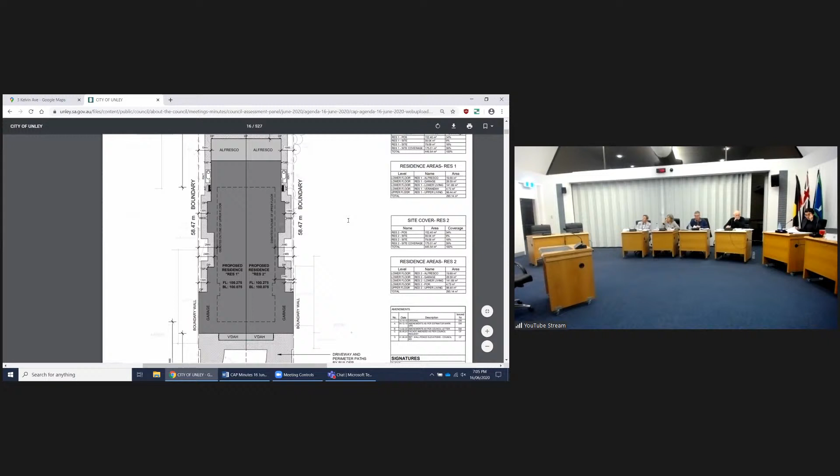So we'll move straight into our first item, which is number 3 Kelvin Avenue at Clarence Park. Members, that's an application to construct 2 two-storey dwellings with garages on the boundaries, and we do have a number of representatives wishing to speak. Before we go into that, Andy, did you want to just brief us? There were 2 representatives who are out of time, so invalid representations. Did you want to just, before we go into that, brief us? Yes.

Council received 5 comments on the application after the public notification period. 3 of those were valid representations because they were received within the time frame. 2 of those were considered invalid because they were received outside of the public notification period.

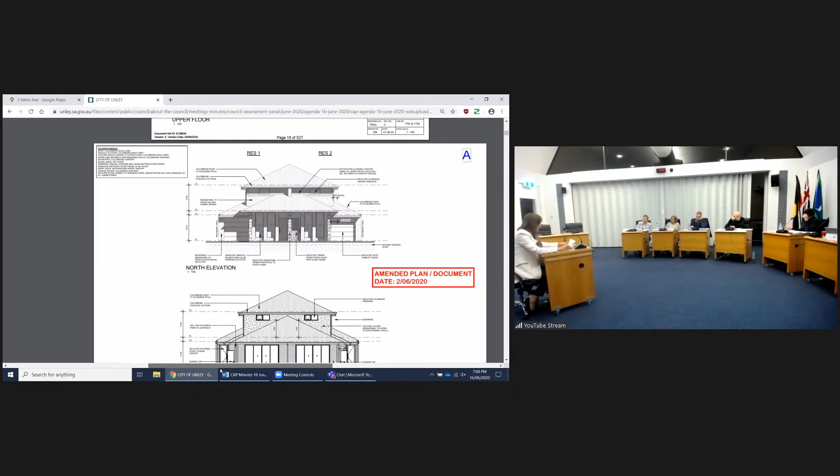PDC 23 reinforces this direction as it also requires the desired character and built form of a development proposal to align with the immediate and neighbouring structures within the zone. This is further reinforced by PDC 29, which advises that the proposal be compatible with the streetscape and the prevailing built form within the zone and the locality. In addition, PDC 32 requires that the appearance of buildings should be of high quality, the visual massing of facades minimised and external fixtures integrated through design methods that have regard to colour finishes, building materials and textures, facade detailing and proportions of solid walling and window and other building penetrations.

Also the articulation of walls, roofs and the use of verandas and eaves. I suggest that the proposed detailing and finishes of this application does not integrate with the building materials and textures of the locality and the immediate landscape, streetscape. For example, the honed stone veneer to the northern elevation specified in this application does not match the uncut sandstone common to the street and the zone in scale and finish. The quality of the selected finishes and detailing of this elevation are not in accordance with the neighbouring properties and so will not enhance the streetscape. Rather, it will reduce the amenity and appeal of Kelvin Avenue.

I have additional concerns around overshadowing and removal of trees. The shadow diagrams are insufficient to determine the impact on the residences to the east and the west of the development proposal. Shadow diagrams for the summer solstice and the 2 equinoxes are also required as the angle of the sun varies depending on the time of year. The shadow diagram should also include an outline of the neighbouring houses in order to successfully assess the shadowing impact.

The landscape plan shows new plantings as replacements to the existing established trees to the rear of the sites. The trees specified are species that will not reach the same height as the existing trees, nor their canopy cover. I propose that the natural amenity of the area may be retained by keeping the existing trees to the rear of the property that do not impact the new construction. All immediate neighbours, occupants and existing bird life will benefit from retaining these trees.

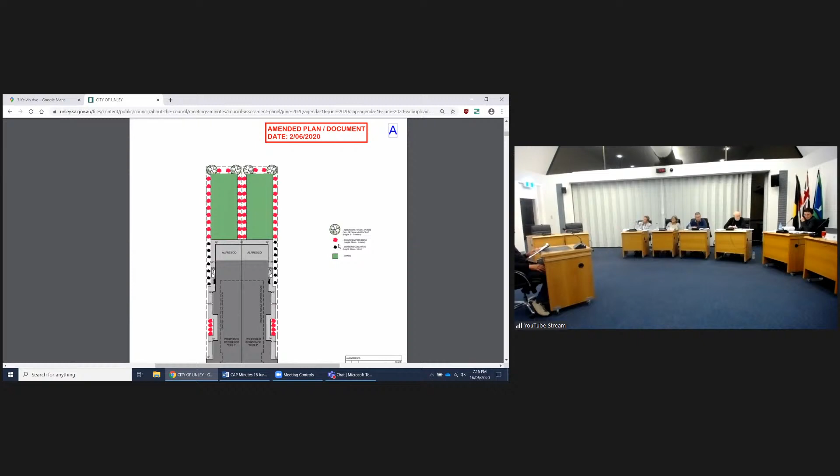PDC 45, car parking: the proposed development does not even meet the relevant table UN 5 requirements. Planning documents state that a large variation increase of 50% is required just to bring it into line with the standard. The on-street parking is considered totally inadequate. Even the current single user regularly uses 2 street parking bays to cater for his needs. However, with this proposal, street parking will be reduced in front of the property to allow for an extra street access for the additional property.

Unlike what's stated in the Planning Department submission, when you have on-street parking near a railway station such as this property, users of all-day street parking from outside our suburb use the street when commuting, which is currently what happens. The number of off-street parking spaces therefore needs to be increased rather than decreased, to accommodate the extra parking actually required. In my judgment, this is extremely inadequate and at variance with PDC 45.

In conclusion, in my judgment, 3 of the 4 items listed in the conclusion of the planning development submission are very seriously at variance with the principles of development control assessment. Thank you.

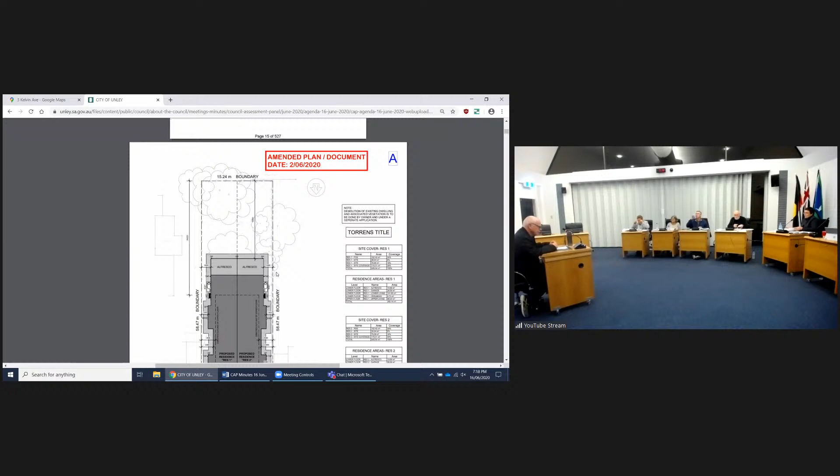The issues which he believes have not been satisfactorily resolved are: first, the proposed development does not conform to the first principle of development control, PDC 1, reinforced with PDC 23 regarding replicating building heights, mass, proportion or siting. He disagrees with Council's summary of issues on page 7 of Council's report, that there are no other similar houses in Kelvin Avenue nor the adjacent Parker Terrace.

Patrick is looking at this from a street perspective, while the council would presumably be looking at a zoning area. There would be very few, if any, similar developments in all of the Clarence Park RB 350 zoning area. From the representations received, it would seem the majority of Kelvin Avenue is totally opposed to this development, described as, and I quote, ugly, out of context, an ugly monolith, looks like no other in the street, and effectively a single massive 600 square metre structure, end of quote.

Second, overshadowing and overlooking of adjacent properties. The shadow diagrams submitted by the applicant are insufficient to determine the impact on adjoining residents. For example, the 10 west-facing solar panels on number 1 are positioned to provide high output during late afternoon in summer to support the grid during peak period. The latest time shown for the shadow diagram is 3 p.m. The loss of solar input at number 1 and number 1A has not been addressed, nor the loss from any future solar panels at number 5.

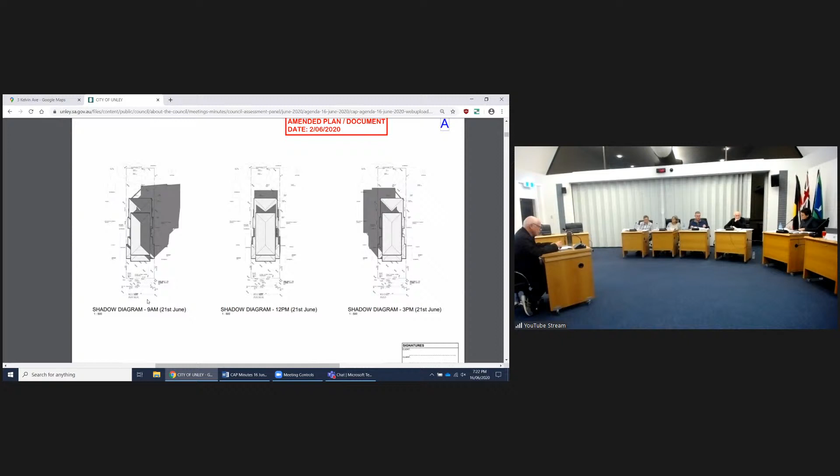Summary. In this report by council, and I quote, upon receipt of the subject application, administration advised the applicant that the proposed dwellings did not adequately address a number of development plan provisions and that the application could not be supported. The applicant made some small amendments and advised they wished the application to proceed, end of quote. The changes made have resulted in the structure being bulkier and higher and not in keeping with the existing planning and development guidelines and the amenity of the surrounding residents.

We ask that the panel, when judging these major deficiencies in the proposed development, do so with fairness in mind for the affected neighbours and neighbourhood, with reference to PDCs 1, 23, 13, 14 and 45, and having regard to the precedent for future projects. In summary, we ask that when making your judgment calls with these major deficiencies, you reject this proposal, as PDC 1 does not comply, PDC 23 does not comply, PDC 13 does not comply, and PDC 45 does not comply. Thank you.

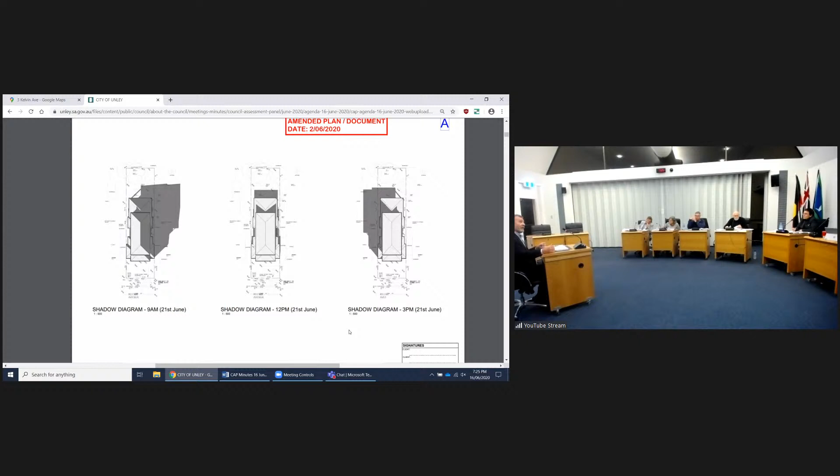As we know, number 3 Kelvin Avenue faces north, so the biggest impact of shadow will be on the southern aspect, their rear yard. The only real effect on the adjoining properties will be early morning or late afternoon, as can be seen on the shadow diagrams.

Another issue raised was the existing rear trees in the yard. Our client currently lives in that residence and will be owner-occupying the right-hand unit, so he'll be well aware of the impact of those trees, whether or not he wishes to retain them. That's something we could also consider to satisfy the representative's concerns.

Regarding the actual application, we took the representative's concerns very seriously and did an extensive review of the designs, submitting amended designs in accordance with a lot of their concerns.

Regarding bulk and scale, we've set the upper storey back another 2 metres from the front facade. The front setback is 11 metres back from the front boundary, sufficient to take 2 off-street car parks as well as the undercover car park, so technically 3 off-street car parks per residence, leaving over 6 metres between the 2 adjoining single crossovers.

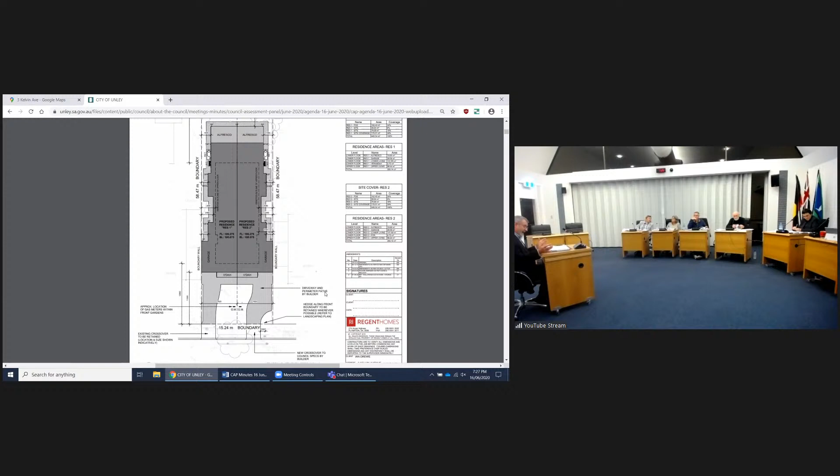We'll also be retaining the existing front hedge and front landscape, so we won't be cutting into that with the new single crossover on the right-hand unit. That keeps a nice softening effect, and the existing street tree will remain too, giving a nice street appearance, especially from the other side of the road, since the upper storey is set back and, on the side elevation, is actually in the same plane as the lower roof. We've also added a front veranda, a pitched roof veranda.

So when you're standing at the street, your eye is naturally looking away from the top. I think the argument about height is really taken away because of the projection your eye takes from standing at road level.

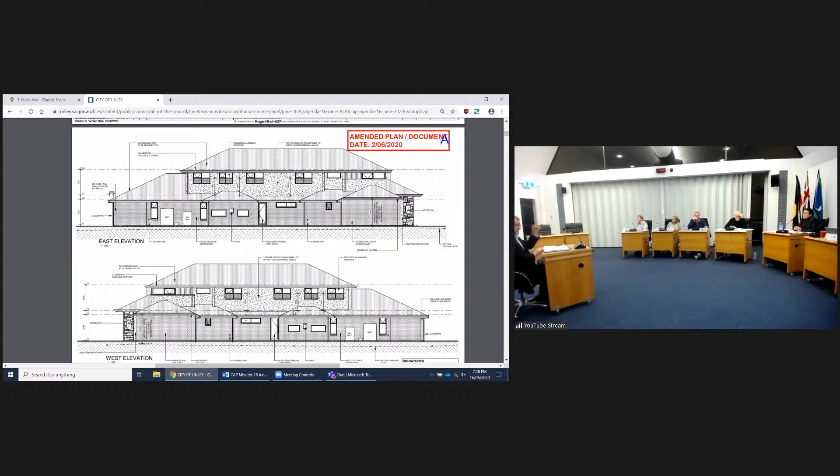Another item the representatives raised was privacy. You can see from the side elevation that we've used obscure glass up to 1.8 metres above floor level, and we've set the window head heights at 2.4 metres, so unless you're 6'6" or taller, there should be plenty of privacy.

As I said, we spent a lot of time and effort reviewing the design. We had a lot of correspondence and feedback with council, so we tried to work with the representatives' concerns, and I think we've come up with a pretty good design to satisfy those needs. We've addressed all the items in the principles of development control, and that's been assessed in the planning assessment. So I think it's a very good design for that area.

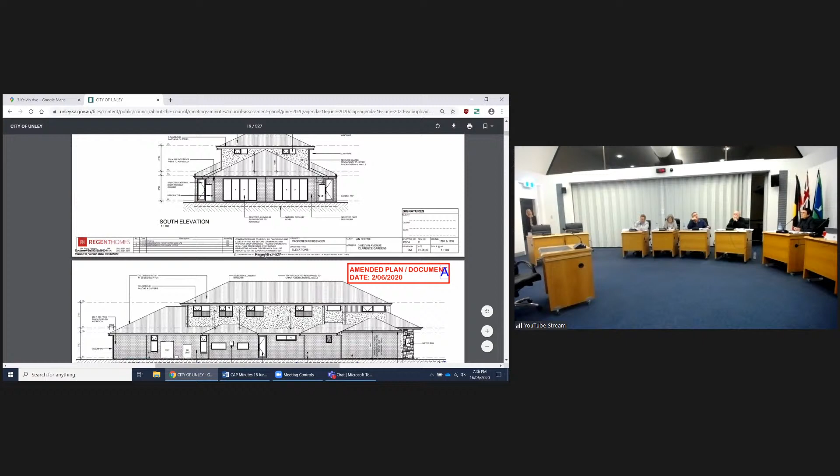Then on the garaging, it's measured by the planners as taking the element of the building that is garage, so from the boundary to the middle section that is not garage - that's how the measurement has been done. So that's 42%. If it was taken by the width of the garage itself, it would be even more than that.

But measured like that, if the garaging to the sides was done as carports, not as garages with a brick wall on the boundary - and the building at the end of the street on the right-hand side, which has got a garage on the boundary, shows how bad that looks. If that was done as a carport - and looking at this street, every house in the street has got a carport to the side, not a garage with a brick wall on the boundary. It doesn't exist in the street.

So if the garages were done like - and there's someone who designs houses like this for a living - it is possible to design to widen the middle section of the building and go to carport to the side and achieve that 30% thing. You'd then have a 2.7 metre wide garage door, which is perfectly acceptable.

The garaging in the development plans for a 4-bedroom house seeks 2 cars undercover. The original proposal was for just a narrow passage and a double garage. The design looks like it's been designed so that internal timber frame wall could later be removed and the double garage put in later. Whereas if the brick wall was brought in to coincide with the middle habitable rooms, with a carport to the side, that would be as it ought to be.

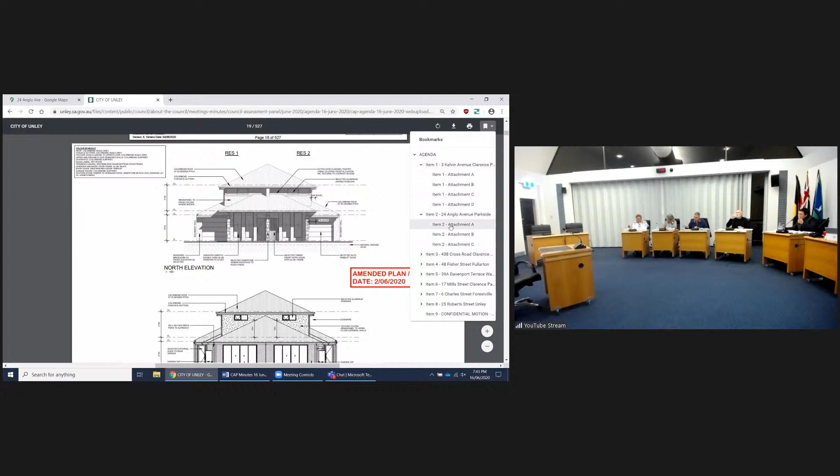We've got one representative and an applicant. Do we have Roxanne Crook? I believe she is here. Please come forward, Ms. Crook.

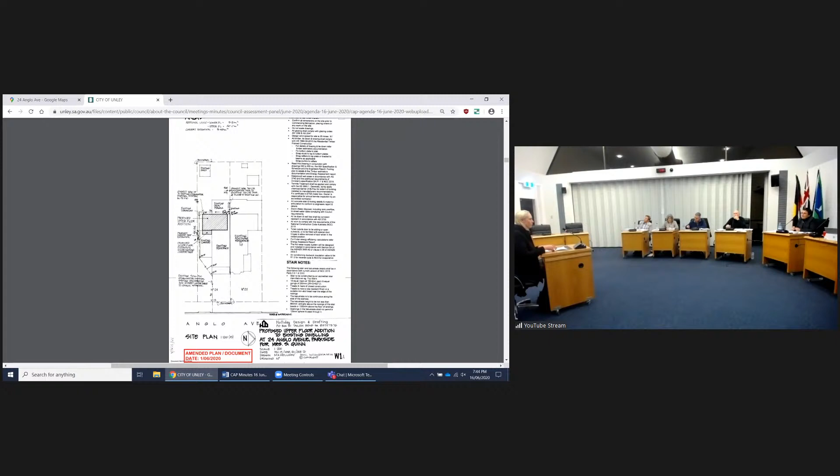We have received your representation and we have read it. We've been out on site and had a look as well, so we understand the nature of the application and the representation. Hopefully you've had a chance to review the council officers' report, which we have in front of us tonight, and you've got 5 minutes to present your case on this matter.

My name is Roxanne and I'm the owner of 22 Anglo Avenue, Parkside, which is the other half of the building that is the subject of this development application. So I am the neighbour, but I also live in the same building. We share a party wall and roof space.

The applicant has asked me to withdraw my objection. A minor change has been made to remove the panelling on the roof. However, I still have concerns and do not want to withdraw my objection.

My main concern is how visible the extension will be from the street and the visual impact that this will have on my home and the streetscape.

A 3D representation of what the extension will look like has been supplied. However, it is not clear from what location, height or angle that perspective is. That perspective is from only one point of view, and I'm concerned that from other points of view, the extension will be much more visible.

I sent a photo to the panel of what the house currently looks like from the street. When I walk down the street, I can see the chimney at the rear of the property. The proposed extension will be much higher than the existing chimney. So if you can see the chimney, you'll be able to see the walls of the extension.

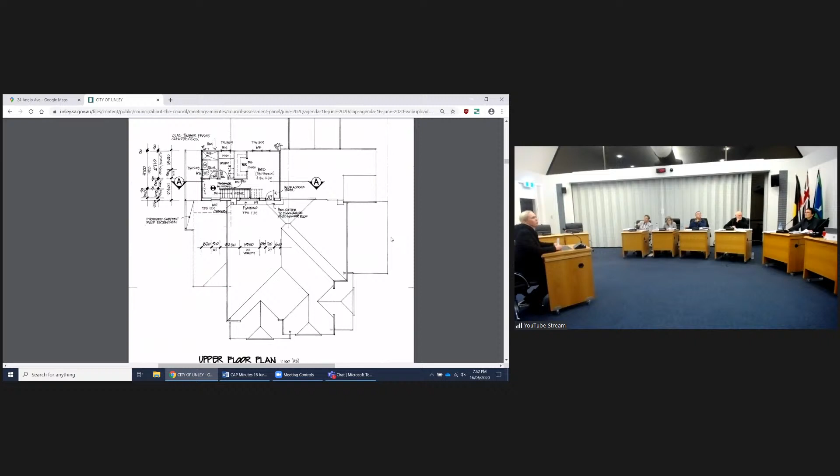I think it could extend further back, but wouldn't go as far out to the side as the person who's in the other half of this building. See how it's got the bathroom and the dressing room to the left? If they were behind, how would you feel about that?

I think that would be better, but I still would prefer an extension kind of like the ones I sent examples of, like 5 Anglo and 58 Grant, where you can only see a bit of extra roof and you can't see any walls.

Thank you. Any other questions? Roger. The only question is about your concern about the windows which face to the front, but you're concerned that there'll be a view onto your front area and the side. Now, I'm just struggling to see that with the roof heights and so on.

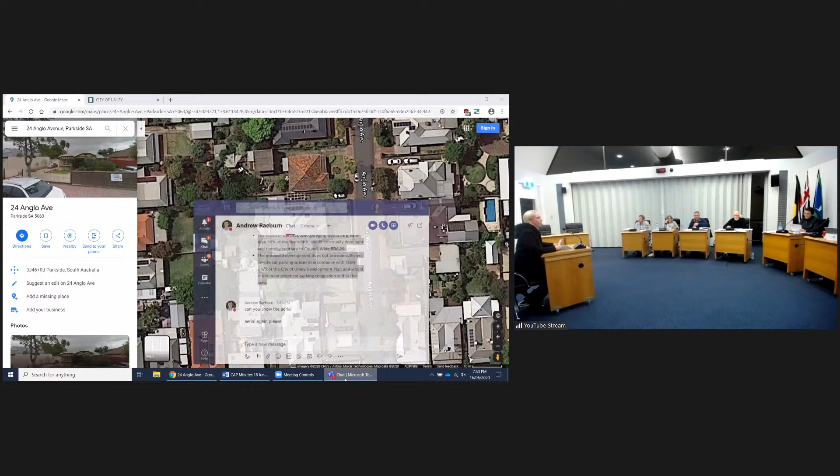In the objection I wrote, I sent a diagram with the arrows. This one? I think so, that's the printout that we have received, a separate document. So a town planner reviewed the plans and they drew that site diagram, and they suggested that the window closest to the party wall might be able to see into that side area where the pergola is. The pergola doesn't have a roof.

Page 93, members. Thanks, Andy.

One question, thanks Brenton. Sorry, one very quick question. I haven't been able to find in the details that we've got - is this dwelling on its own separate Torrens title? So it's not strata. It's not strata. Thank you, yep, that's great.

Any other questions? Thank you, Ms. Crook. Okay, thank you.

Do we have the applicant? I believe, do we have Miss Quinn? Thank you, please come forward.

Thank you, Ms. Quinn, we have your application. If you could respond to the representation plus the material we have before us. Thank you, we have 5 minutes.

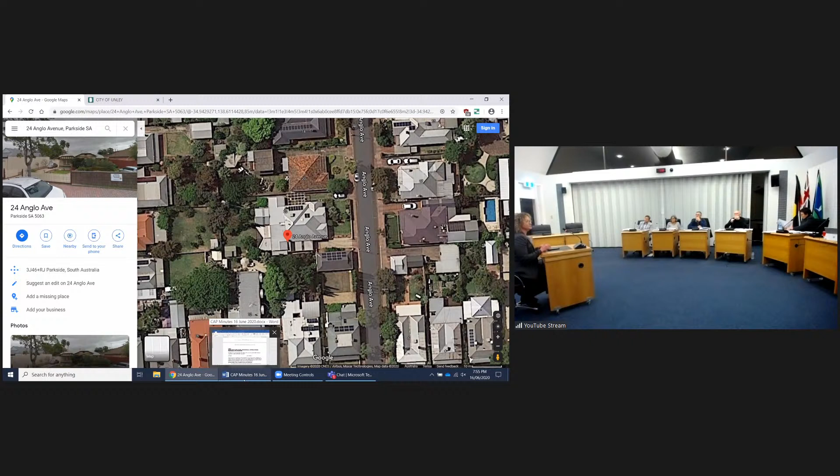Thank you for the opportunity to speak tonight. I'm the owner of 24 Anglo Avenue, and part of the reason for the extension is that I actually really love the character and the area of Unley. I did originally look at places to buy, but I realised I really enjoyed the location where I am, and also the character of the home. I realised that moving into another area, I wouldn't be able to get the same character of home that I love.

I found out that there had been a proposal for the extension previously approved by the council, and so decided to pursue that option. Like Ms. Crook, the character of the home is really important to me, and part of the design was to ensure that the property kept in character with the existing house.

Whilst some properties might just have a normal sort of frontage, the designer has kept in line with the development plan. There's sandstone put on the front, although part of the issue in regards to that was the streetscape, and the extension is actually over 20 metres back from the street.

So, I guess these are 2D drawings, and so I engaged a 3D designer to show how the extension at the back would look from the streetscape. Due to how far back from the footpath and also from the current part of the property - you'll find it's on the right at the back of the property - there'll be minimal appearance from the street, and the continuation of the roof looks like it will be part of the original roof.

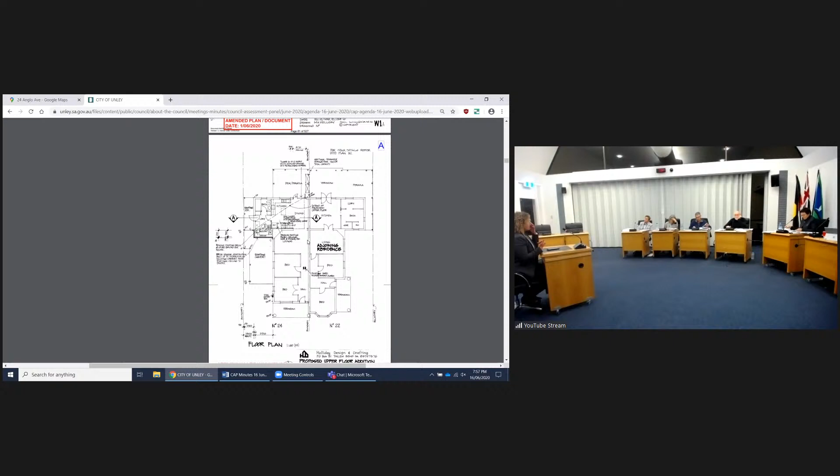Some of the other issues addressed - Ms. Crook mentioned the overlooking of the property. Again, the property is so far set back that my understanding is it wouldn't really be possible to see into her yard and also into the backyard, because we both have pergolas that are set back beyond where the extension is, so that blocks any viewing.

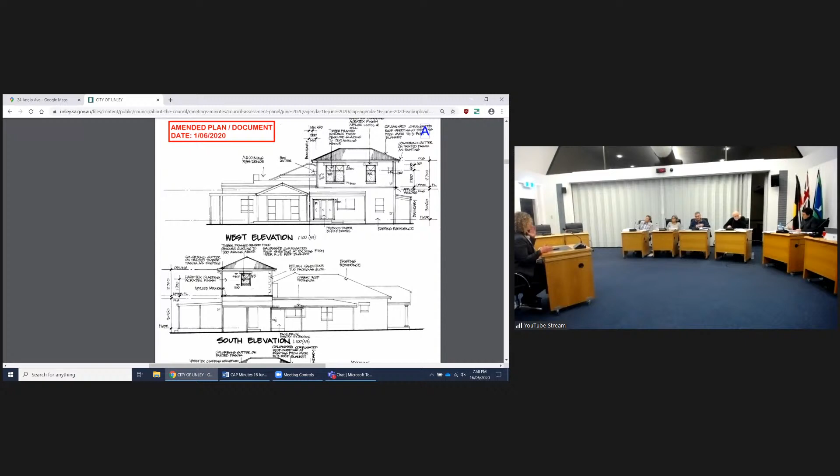There's also on both sides of the property, into Miss Crook's yard and also into 12 Regent Street, quite a number of trees, so there really isn't a possibility to see even from the second extension.

There's some of the shadowing issues addressed in the other representation. Again, the 3D diagrams show that there should be minimal shadowing and overlooking of the property. The trees used in those diagrams were 5 metres, and in reality those trees are a lot bigger than that, so that should even minimise further any potential shadowing issues.

Ms. Crook mentioned just then about it being set out further than the existing properties. I'm not quite sure I understand that, because the extension is currently only over the existing part at the back of the house, so it's not going out any further than what the house currently goes out anyway. I'm not sure if I understand that comment, so if there's an issue I would need clarification around that.

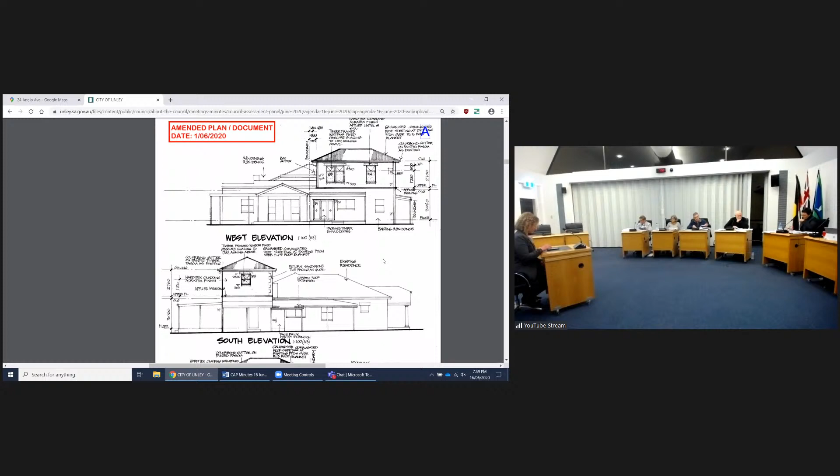There was also, no problem - there was also an issue about potentially moving some obscure glass subsequent. That obscure glass is in a bathroom, so needless to say, I don't want anyone looking into that either. But yeah, thank you for listening.

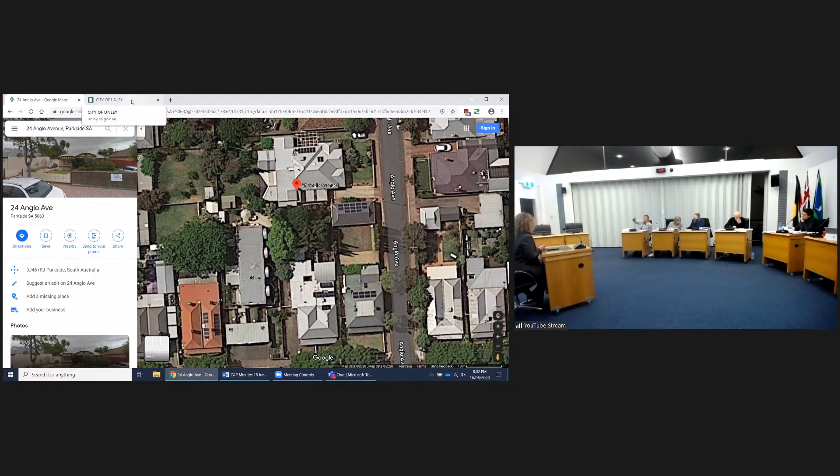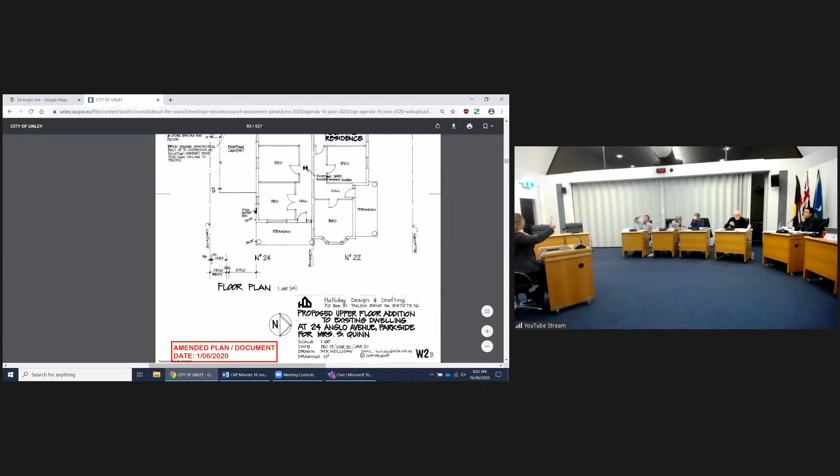So your designer sort of said it would be okay to just go up on that wall? Yeah, so he didn't actually understand the development plan, I suppose. Did you give any consideration to orienting it with the wet areas behind the bedroom, going over your outdoor area, so that it wouldn't come within that 3 metres off the side boundary? As in, if I'm facing so it's oriented to the back, south at the moment, with the wet areas behind or to the south of the bedroom.

Did you give any consideration to orienting the wet areas to the west of the bedroom, over your current outdoor area? Yeah, I think we did discuss that, but because of the rectangular shape of the extension and wanting light to come into the bedroom, if we put the bathroom on that side it would minimise the natural light coming into the bedroom on the west side. You've got an east-facing bedroom window there as well. Yeah, okay, thank you.

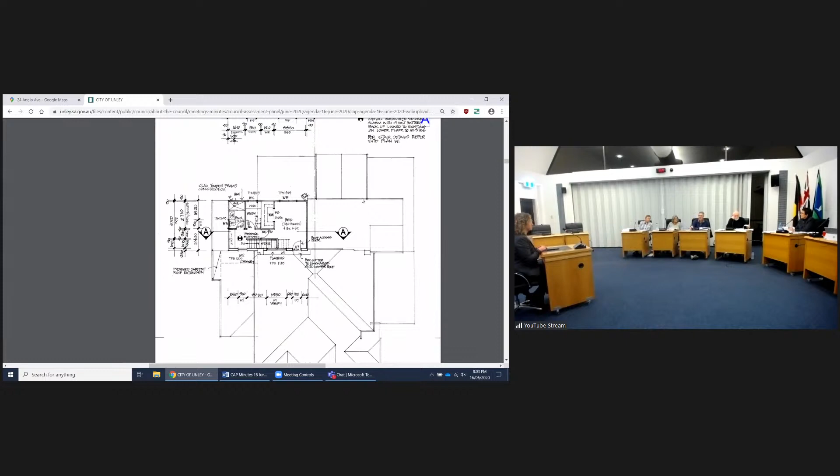Thank you, Brenton. Just a couple of very quick questions. The kitchen area below where this extension is going to go, that's got high ceilings, 3 metre ceilings, is that right? Yes, same as the rest of the house.

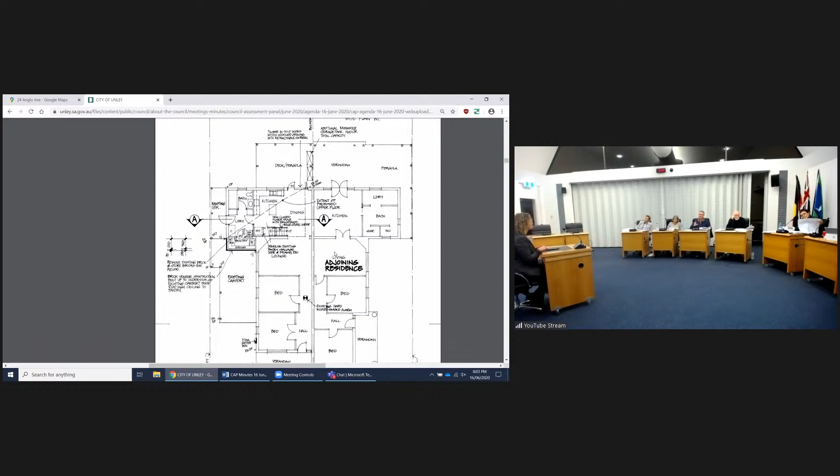I don't like to try to redesign things, it's not our job. But the extension that's been proposed has got 2.7 metre high ceilings. Did you think about whether it could be a lower ceiling to reduce the bulk of the building? Was that thought through? So 2.7 for the downstairs floor, and upstairs your kitchen's already set. Yes. One option would be to lower the kitchen ceiling, and also lower the floor to ceiling height of the upper storey to reduce some of the bulk. Was that thought through?

We did consider that, but the issue is the lounge area opens onto that back area, so you'd have a drop in the roof, and honestly it would look a little bit silly. Plus it's not really in character with the original extension where the kitchen area was done to try to keep it consistent with the old part of the house, so dropping the ceiling would look a bit silly in a home like that. Also, after getting the 3D presentation drawings done, it looked like the roof is really a continuation of the current roof anyway, so the top of it isn't standing out, and it still gives that single storey feel.

Okay, and my last question was, you mentioned that back in 2006 there were plans approved for an extension. Well, that's what the owners told me, whether that's true or not. So this doesn't match up with those plans that were approved? Yeah, it does. It does?

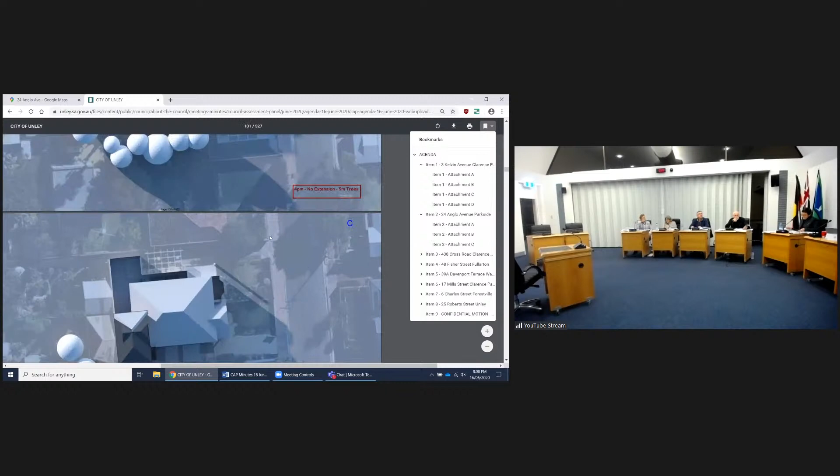The perspectives are taken from an angle looking at the front elevation, so obviously it will be diminished in perspective, but there's not a perspective looking down the driveway where you'd really see it. The perspectives are taken from more near the middle of the house, where the house from that angle does more conceal the upper level addition. But the helpful 3D view would have been looking down the driveway, because that's where you'd really see the upper level addition in context relative to the height of the building, and you can't tell how accurate those perspective views are.

I can't tell whether they're accurate or not, but from the angles they're shown, it isn't particularly helpful. That's why I'm ascertaining whether perhaps the applicant might be able to confirm.

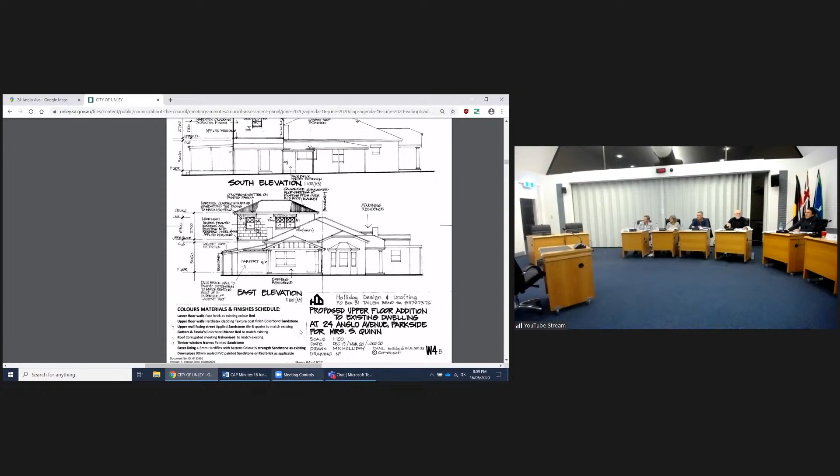Yeah, I'll address the representation. I couldn't go next door and chat with anyone, but when we had the discussion, Roxanne suggested that maybe if I got some 3D imaging that could show what it would look like—so that's why I got it done. We've done it front on because that's what the plan shows.

Right, thank you. Any other questions, members?

Just for staff, on those 3D representations—do you have any comment about them, about their accuracy at all? Just looking at it, I know they are taken from someone down the street presumably, but you look at the overall roof height of the extension and the roof height of the dwelling, which is probably at a similar setback—they look similar, but the plans don't indicate that. I just don't know how accurate they are.

You haven't been able to look at that? We've got no reason to question the accuracy of it, but setting that aside, if you look at the elevations and setbacks of the upper level, I think even without the 3D perspective, the recommendation would remain the same.

Members, on that point, if the perspective was taken looking down the driveway where you could actually see the perspective line of that top ridge and the side of the house, you could better gauge whether those perspectives were accurate. They look lower than I think they would be to my eye, but from the front-on angle like that, you haven't got a reference point to be able to gauge that. The 3D view doesn't help with that.

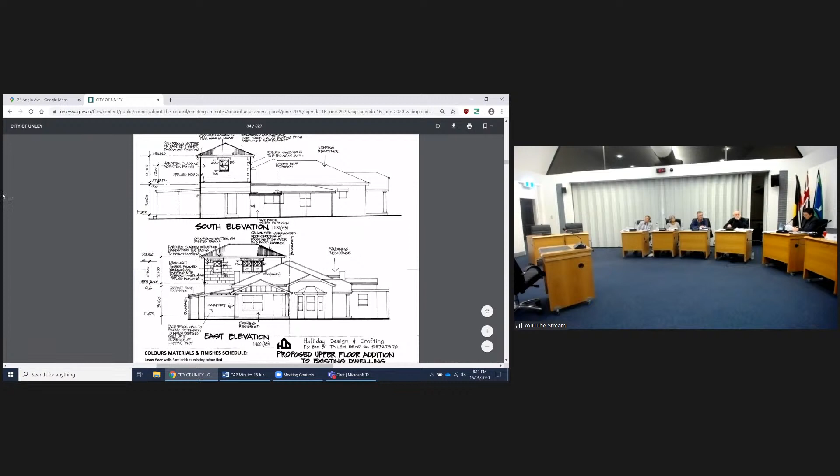Brenton: I'm going to move as recommended by staff. Whilst this is a fairly boxy extension, I'll say, it could have been reduced in height, as we talked about earlier, by dropping the floor to ceiling height of the existing kitchen, dropping the height of the extension from 2.7 to 2.4 metres, or building some of the roof space within the roof. But I think it gets over the line from a planning perspective.

I don't think there's any issues with overshadowing, particularly with the existing vegetation to the adjacent neighbours. I don't think with the treatment of the windows that there's going to be any issues of overlooking of the neighbours, and the setback of the extension is a long way back on the block. So from a streetscape perspective, I don't think you'll read the extension to the same level as the plans actually show. I think the plans are misleading in terms of being a 2D vision of this particular application. So based on that, I would move as recommended.

Someone willing to second that motion?

I think maybe it could be a better result. I think the policy talks about it being either-or as far as setting into the roof space, or being sufficiently distant from the frontage so as to be inconspicuous. Now, as for how you might define that—yes, from the driveway, looking straight in, it's visible—but again, that's just one view of it. So I don't think it is in conflict enough with that principle.

And I agree with Brenton about the overshadowing, I don't think that's a major issue. Similarly, I don't believe there's an overlooking issue from those front windows. So I'm happy to support the recommendation.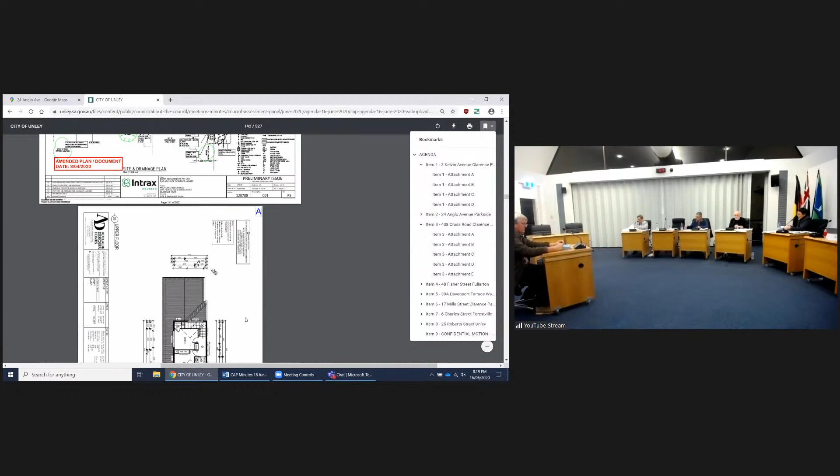Firstly, let me thank you for the opportunity of addressing the panel. You should have before you a copy of my initial objections to the development proposal, and it's to the second objection that I wish to expand this evening. This relates to the parking of vehicles contained within the proposal.

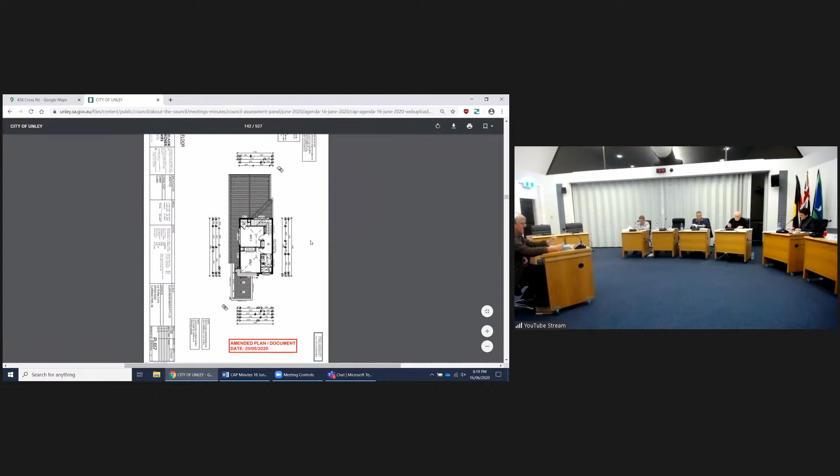I believe the development application, as it currently stands, does not adequately cover the requirements of the Unley development plan, transport movement of people and goods objective 7, which states a form of development adjoining main roads will ensure that traffic can move safely and efficiently and provide for adequate off-street parking. This objective states that the development will provide for both.

I also note Part C does not distinguish between the parking of residents' vehicles or visitors' vehicles, remaining silent on such distinction, but does dictate that the parking provisions must be adequate for the development. It is therefore my submission that the panel must consider if the current proposal has sufficient parking to accommodate all persons residing or visiting the proposed development.

If you agree with this submission, you'll find the current proposal lacking. What I assert is there has been insufficient consideration given to provide sufficient parking spaces within the development to cater for the potential number of occupants and visitors' vehicles, and that any subsequent overflow of vehicles will find their way to the nearby pull-out areas located in front of adjoining and neighbouring premises.

This will restrict the residents of those premises' usage of the pull-out areas and therefore the ability to safely access and egress their dwellings, driveways onto Cross Road.

I speak from experience. I've owned the adjacent premises at 436 Cross Road for 31 years and have resided there for 6. Between December 2018 and 2019, I visited the premises on a daily basis while doing renovations, so I'm well acquainted with the importance to road safety that an unoccupied pull-out area provides.

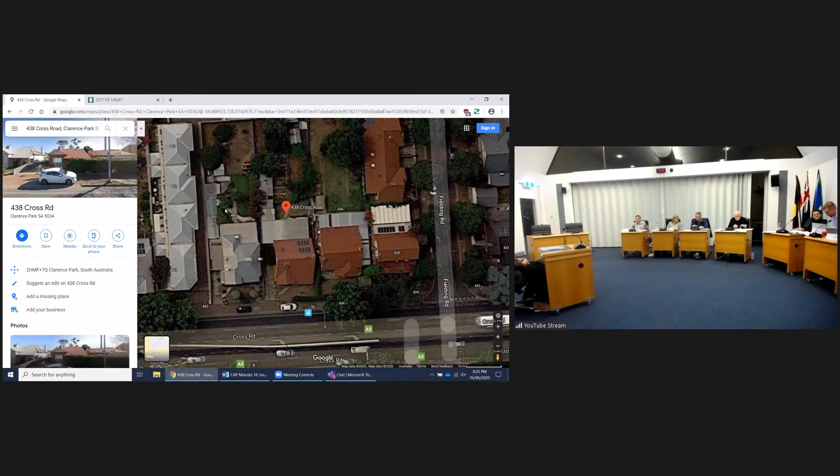The question I'm just getting at was, what would your feeling be about having the splayed access to the common driveway for the subject property, coming across the footpath at an angle partially in front of your property. Is that something you would be opposed to or comfortable with? It's got a 7 metre wide splayed driveway, so it goes from the driveway width where it's in front of the house, and it splays to 7 metres in front of the existing house.

It's already indicated that's what he intends to do, isn't it? Yeah, he intends to splay it, and by that way he'll be cutting across his own pull-out area. So that would basically negate that area, his area. Not mine. But you would be averse to any kind of access to this property that involved cars traversing in front of part of your property on the public realm? I don't understand your question, actually. I don't see how, if he was to cut across his own front yard, that would impact on my pull-out.

Would some of your concerns about the parking be alleviated if the rear dwellings were pushed a bit north or made a bit smaller, so that the front dwelling could have 2 car parks coming off the... At the moment, the front dwelling only provides 1 car park, which is deficient from what the development plan requires. Would you be happier if the 2 dwellings at the back went further back, such that you could park 2 cars perpendicular to the back of the existing house? That would assist in the number of occupants that could occupy the premises.

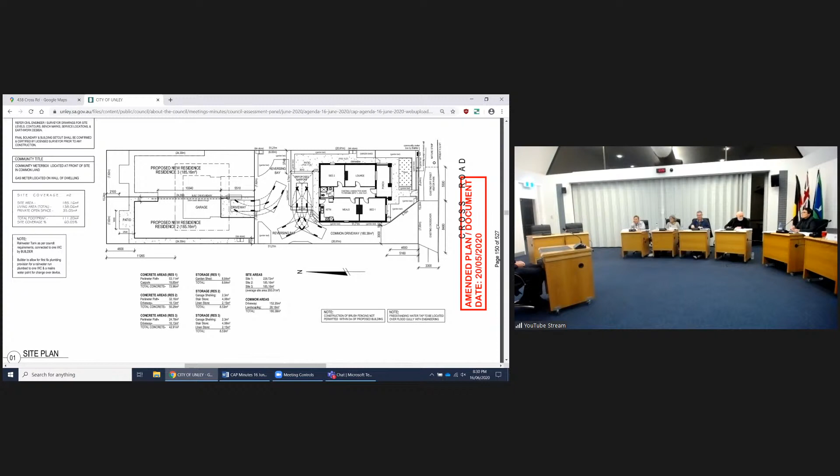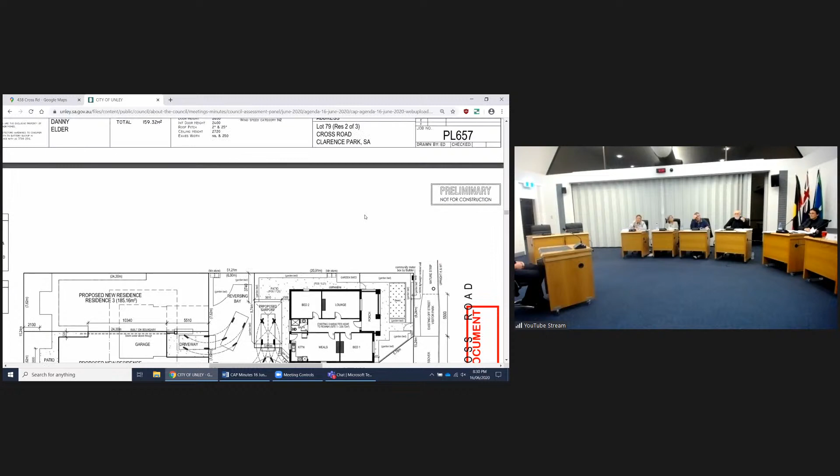It doesn't actually take out the car park in front of this dwelling, because part of the land division approval received is to actually extend the current park there, so we'll still maintain the car park. Okay, well that's good - so given that fence will look very odd there, as the applicant would you be open to making that fence a low fence rather than a high one? The high fence compounds the odd-looking fence line across the front of the property, whereas a low fence wouldn't look so odd. Is that something you'd be amenable to considering as advice? Happy to consider it. I think with it being a main road as well, there was also the ability to maybe try and get a bit of a noise barrier to that front home.

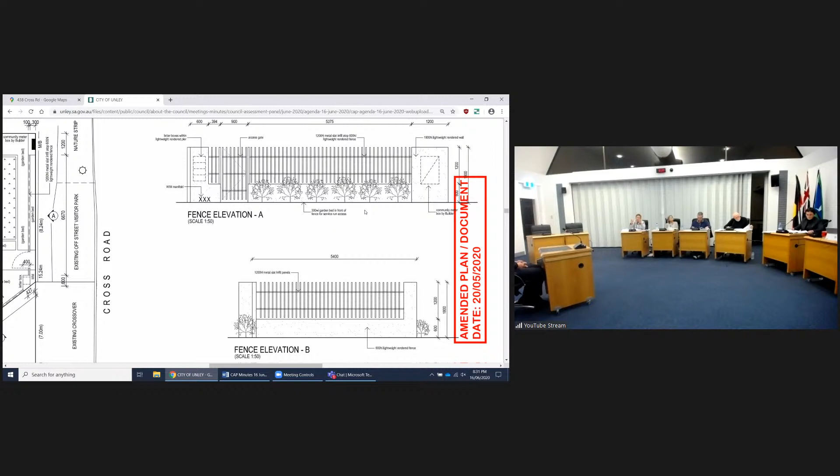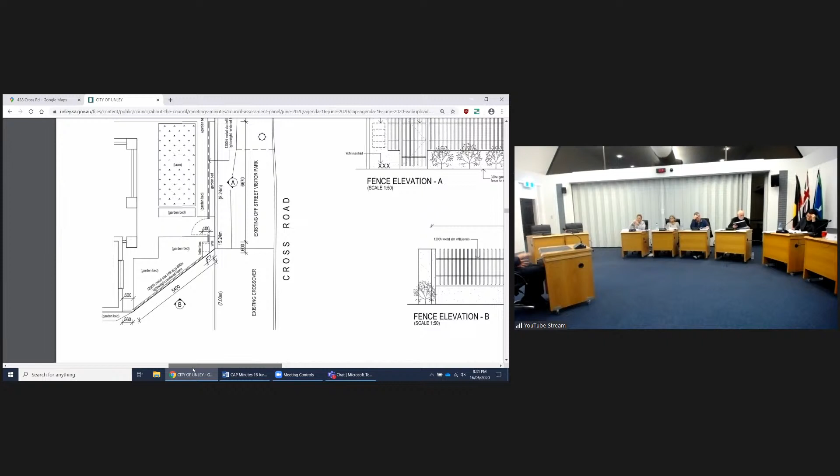Yeah, so the fence as designed is an open palisade fence that won't provide any noise mitigation. Well, doing a hedge there - the hedge also won't provide any noise mitigation, but putting heavy glass on the windows would. So you could have a low fence and heavy glass to mitigate that issue without the house looking odd - that's why I'm asking that question. To be honest, I'd probably prefer to stay with what we've got and do the hedge just for that softening effect, but I suppose... or a low fence with a hedge. Yeah, a low fence with a hedge - look, not opposed to it.

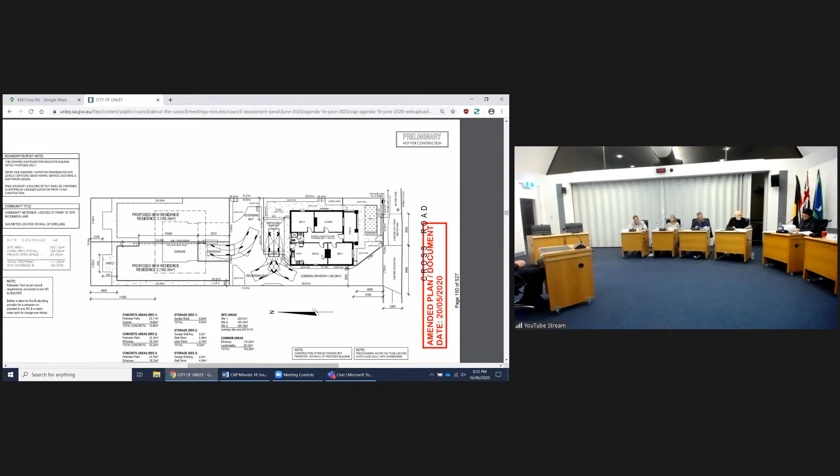The other question is, and again I was asking the adjoining owner, it's deficient in car parking - it's only got 5, not 6. Looking at it, there's a 6-metre driveway area, and then there's 4.6 metres between that driveway and the back of the existing house. Would you consider either reducing the size of the rear dwellings or moving them further back so you could get a 5.4 metre distance, so you could park 2 cars for the front dwelling, and provide 6 cars total, which would increase the value of the front dwelling and enable double side-by-side parking?

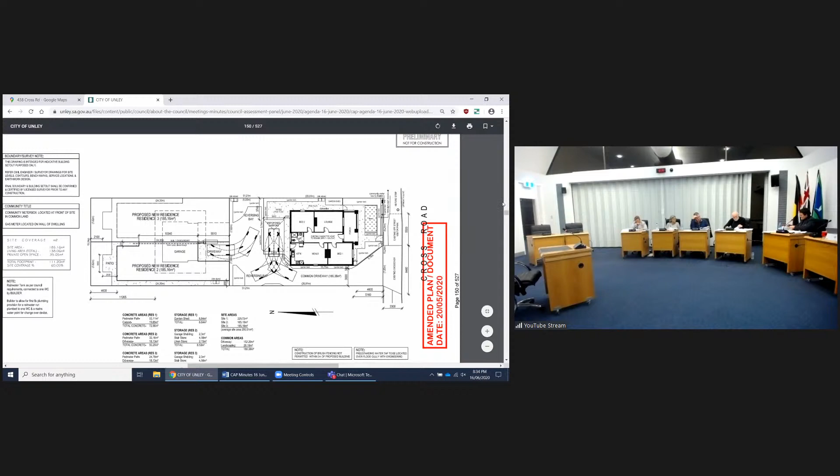Members? Brenton. On the advice from the referral to the Department of Planning, Transport and Infrastructure, on page 210 of our agenda, there's a note about the Metropolitan Adelaide Road Widening Plan, which may require up to 4.5 metres of land along Cross Road. I'm conscious of the proximity of this site to intersections. Should that 4.5 metres of land ever be required, how does that work in terms of this particular property? Have you given any thought to that?

It is an advice, and DPTI are the agency responsible, and there will be a referral. Consent from the Commissioner of Highways is required for the application in any event. But I just wanted to clarify how we actually deal with that. My experience is that it is a real issue for DPTI, and they would usually use the referral process to elevate that to us. They've had two reviews of this application, and I don't think that's an issue at this stage.

That's my second question. Just to confirm that there has been a land division application approved for this site, which divides the site into 3 allotments plus a shared right of way. Does that to some extent restrict any changes discussed in terms of pushing dwellings back or providing additional car parking for the front dwelling? So basically, does the land division lock in a lot of the design options that were first being talked about?

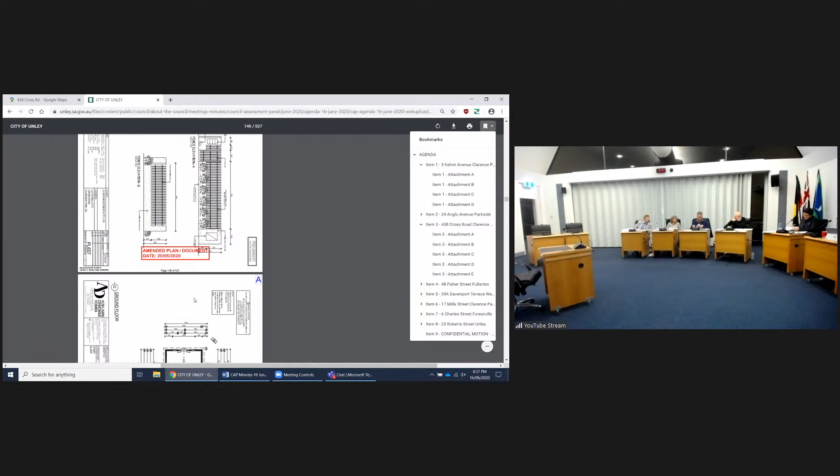Is the size of the rear gardens of those rear dwellings a minimum requirement? Were they required to make a rear courtyard of that size for those rear dwellings, which is pushing them forward? Is the 4.6 metre depth of the rear courtyards a requirement of the development plan, or could they have made those courtyards 800 mil narrower to enable double parking for the front dwelling?

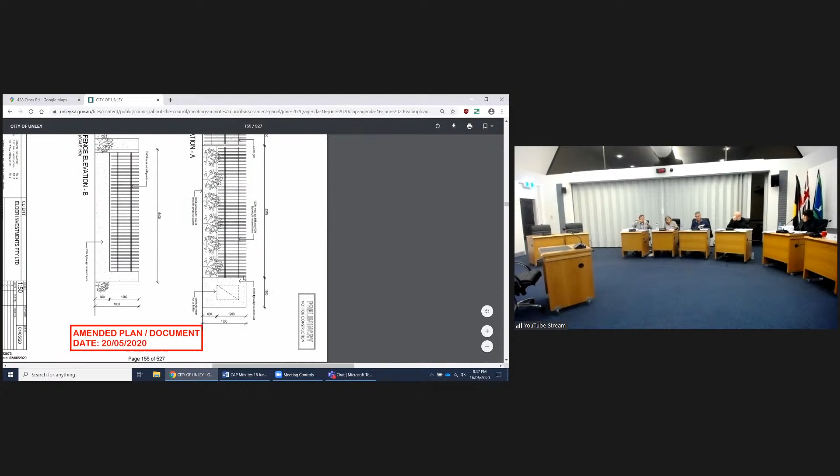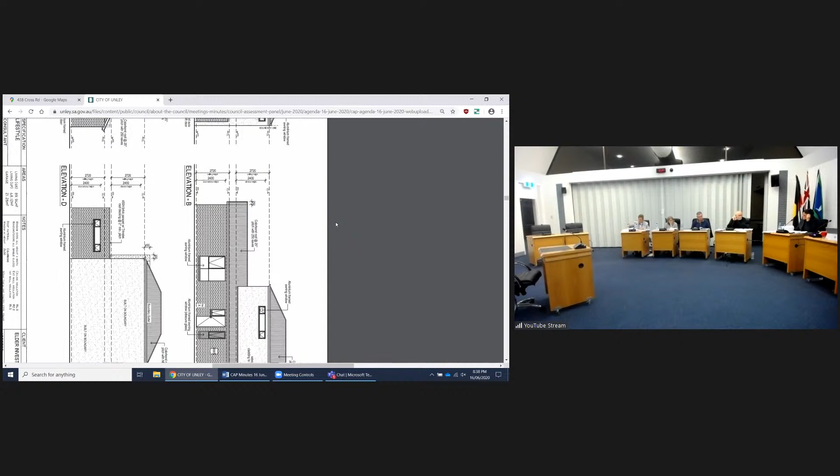I'll direct you to page 128. It does meet the minimum dimensions required for private open space. Does that answer your question, Sandy? Yeah, so they're only required 3 metres, but they're providing 4.6. Oh I see, 4 metres, right. Okay, so they're 600 mil more than the minimum. So they could have provided 600 mil less and then provided parking for the front. That would reduce their overall private open space allowance, though. Yeah, and I see that they are already on the minimum recommended.

I'm happy to move as recommended.

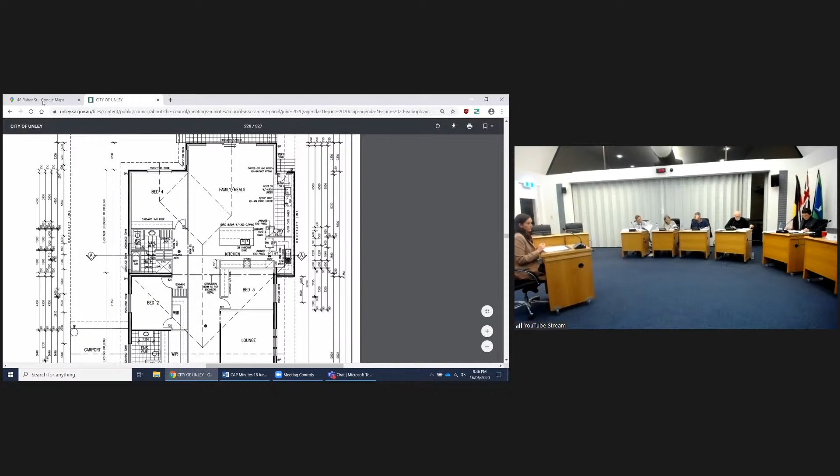There's also a note of the rear yards being shaded by the boundary fence. It's a 1.8 metre fence, pretty standard, not too much shading happening, 2/3 of the proposed wall height. It also says there is a non-regulated tree growing on the land to be removed. That's not true - there's no trees that shade from that property. There hasn't been any since we renovated our little garden, that was in November. So that is simply not true, and it's also not filling us with confidence about any of this.

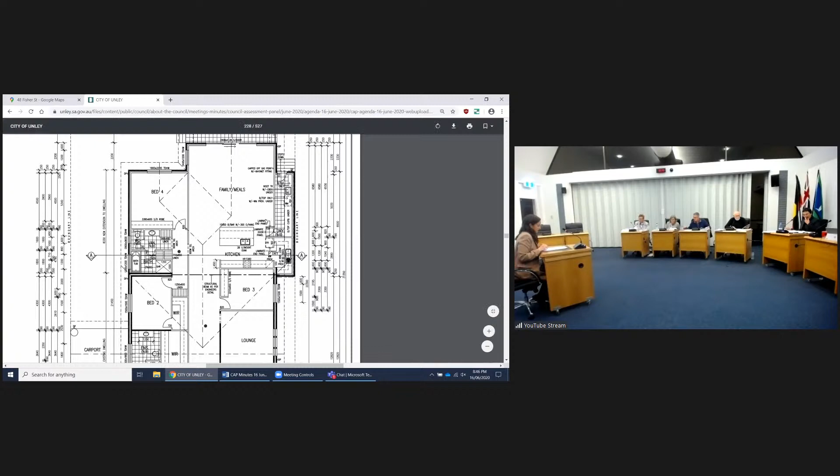Our concerns are we haven't been able to be informed which properties are affected. Site plans, survey, floor plans weren't provided on request of the additional amendments. Not knowing what the wall will look like on our side makes it hard to support. To know the applicant intended to build a 4 metre wall when council had assured us it was a 3.5 metre wall greatly concerns me. To have a statement about a tree that is not there and has not been for longer than 6 months, and the planning officer didn't relay that information to us, potentially - I'm not sure what's happened, but it is quite concerning. The overshadowing is still a concern, as is the appearance, and there's been no further detail on it.

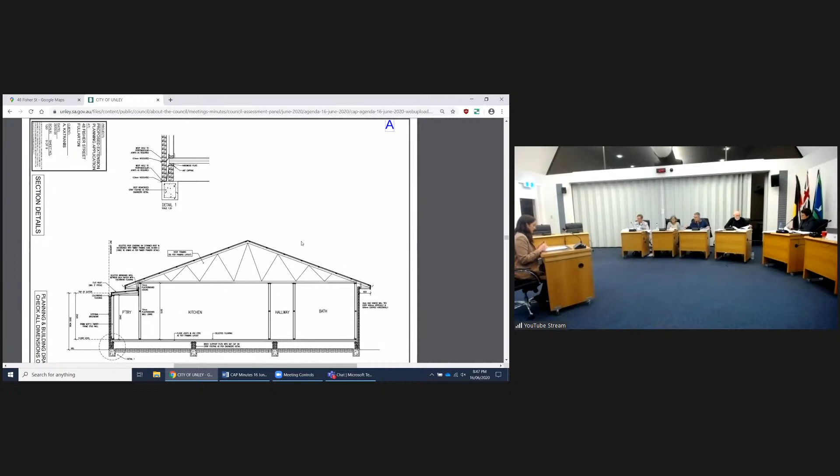It's been really disappointing, the level of detail that hasn't been provided, along with variations in information from what the applicant's saying they're going to do and what the council has told us is going to happen. We request that council reject or at least defer this application on the grounds of misinformation and significant lack of detail provided. We'd like this to be presented properly and accurately, and our queries addressed before a decision is made.

Thank you, Ms McLaughlin. Members, do you have any questions?

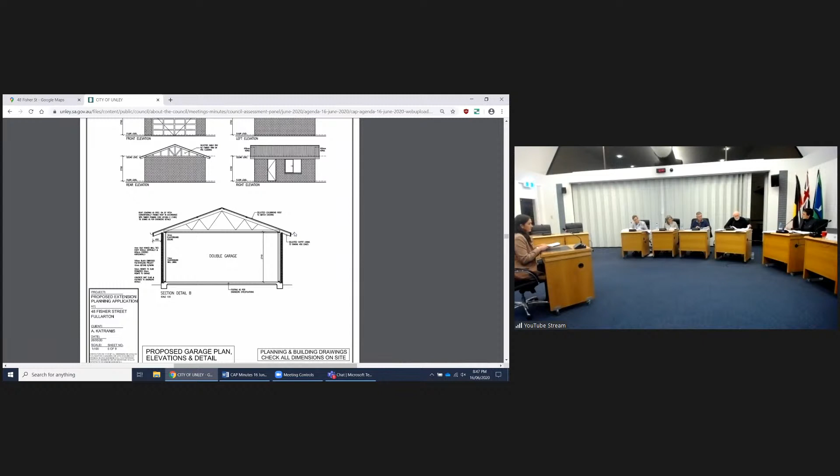Just trying to clarify, I guess the applicant can confirm exactly, but an 8.2 metre long wall on the boundary - yes, so that plan was shown, the original that we objected to. And we were told it was going to be reduced to 3.5. Yeah, but the plans that we have are 8.2. That's all I want to clarify, and I guess we can ask the applicant if they've exactly gone back to the original, which is what we originally objected to. So yeah, I guess we're concerned still.

And you're concerned about overshadowing and so on - this is all single story. Yes, it was just a slight overshadow we were concerned about, and the appearance was the main concern.

Okay, thank you. Any other questions, members? Sandy? You spoke about the length of the wall being 3.5 as opposed to 8.5, and then 4 as well - there's been a few different.

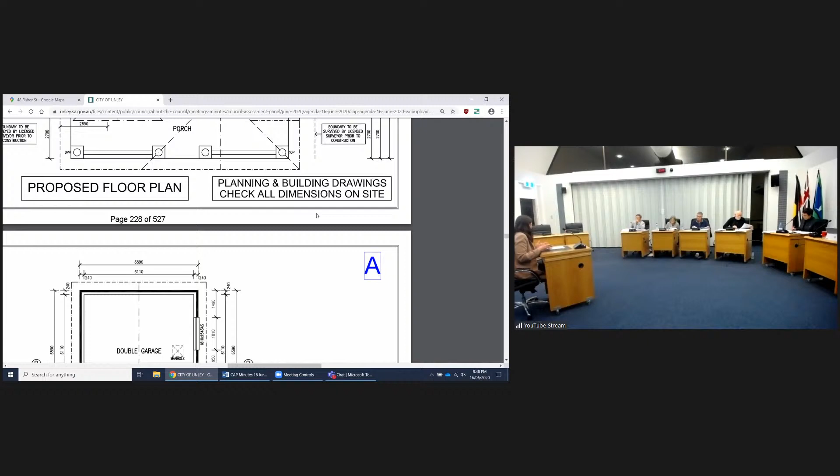So would you have been happy if the wall was as high as it is, but 3.5 or 4 metres? We said that we would agree to that and withdraw our objection. We wanted further detail on the appearance, but we said - I spoke to the planning officer and I said we were going to withdraw our application. Why are we being taken to this meeting for the original wall when we've said we don't want to go any further? We don't want it to not go ahead, however, going through this and seeing all this misinformation, it really doesn't give us a lot of confidence now.

Given the proposal has got a pantry and laundry cupboards on that, the height could be at least a foot or more lower, could be 1,800 under cupboards. Would you, if given the option between a wall that high that's 3 or 4 metres long, or a wall that's that long but lower, what would you prefer?

Well, without the detail of what the wall is, regardless of the same material, if it was a long low wall versus a high short wall, what would you choose between? Probably the longer short one. If it was 1.8, that's our current fence, I'd be happy with that. I'd be happy for it to be 8.5 metres.

It'd be more than that with the floor structure as well. But yeah, 2 feet lower, that would absolutely address our concerns. I just feel the concerns hadn't been addressed or even interpreted.

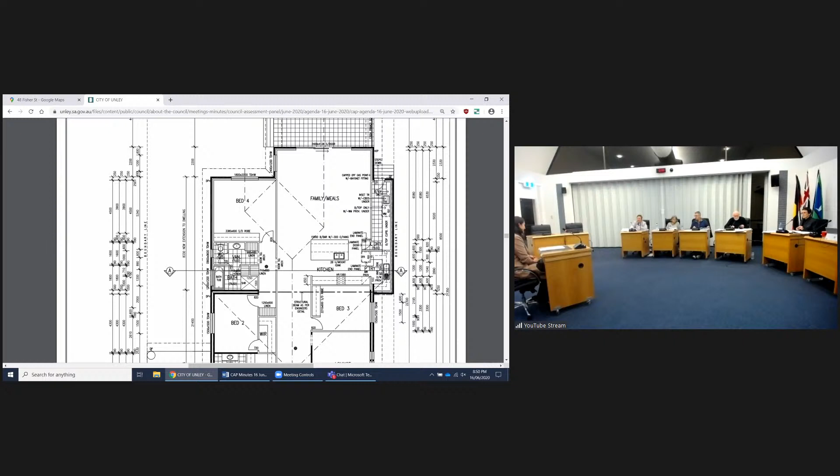Sure. Okay, thank you. Any other questions, members? No other questions? Thank you, Ms. McLaughlin.

Do we have Zach Diamanti? Mr. Diamanti, you have 5 minutes.

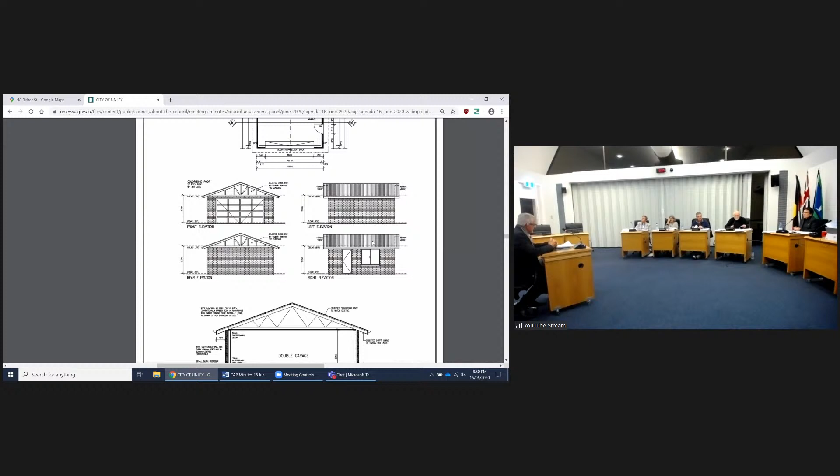I'm a bit intrigued as to the lack of detail, because the plan shows brickwork and gutters and all the detail of what the building's constructed from. I don't know whether we have to give the type of brick and mortar we're using, or whether that's enough detail, which I understand is enough for a planner.

When we first got the objection, yes, we did reduce that laundry area and put it on the other side of the house, which was, to all intents and purposes, the wrong place to put it, on the driveway side. However, we did that with a view to perhaps getting the objection withdrawn. Our understanding was that the objection was not going to be withdrawn, so the owners decided to go back to the original 8.5, or 8.2 sorry, which is within council guidelines, I guess. And yes, the tree was removed.

It's not a listed tree, not a particular species, so that was removed going back ages ago. If you look at the Google shot from over the top, that tree shaded the whole backyard. That's the nearest one to the back of the house, it shaded the whole backyard. Now that's gone. That was 12 metres high, it's now 3 metres high, which is within council guidelines. So I'm not quite sure why we would object to any of those things.

The current fence on my last measure was actually 2.1 high. The height of the wall is 3 metres, which is much higher than the current fence line. So I'm a bit confused on that one as well.

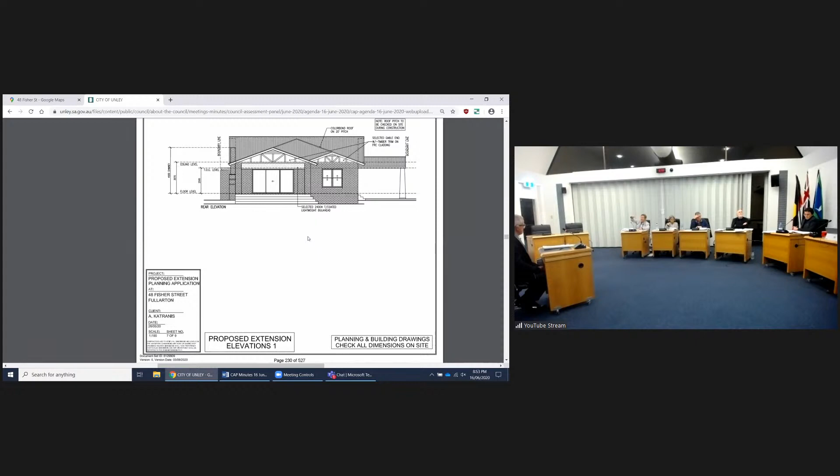Sandy? You're the designer? Yep. Did you give consideration, given that the pantry and laundry cupboards there need only be 1,800 high, to minimising the wall height by using the fact that you had cupboards there, by having an addition that stepped down like that? Did you look at that as an option to mitigate the impact on the roof?

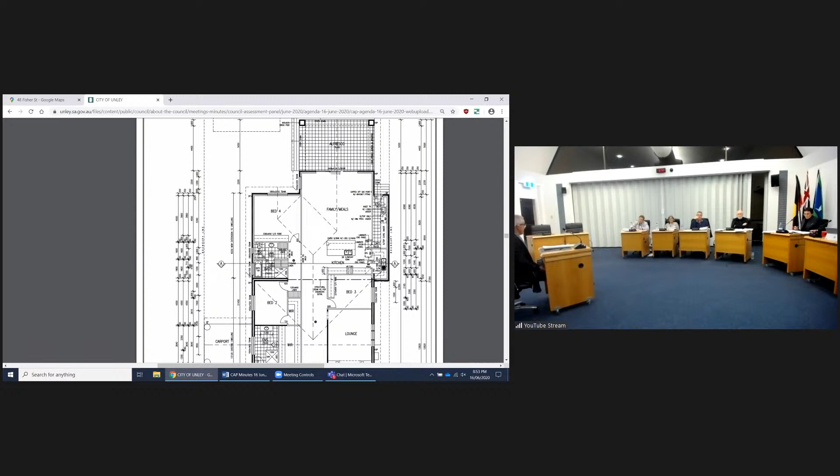We did talk about dropping that height just over the cupboard, creating a separate roof and a bulkhead over those cupboards so that we could drop the roof down another 300 or 400. It seemed pointless because we were within the guidelines anyway. The development plan says we can build up to 3 metres. The owners were not too keen to end up with a raked roof or raked ceiling inside to get that height, so we maintained the same level.

No, I wasn't talking about a rake, it was about steps, slipping the same ceiling height drops down where the cupboard is. Yeah, and the walls. Well, you would have had to pitch the roof lower to get that and drop the roof. So we were trying to keep, we're down, I think, to 2.5 in that area, probably about as low as you could go without feeling a bit of a crunch, I suppose.

Thank you. Any other questions, members? Thank you, Mr. Diamanti. Thanks. Members, do we have any questions for staff?

Brenton? Confirming with staff, I just want to ask the length of the wall on the boundary. Can you please confirm what we're actually asked to consider tonight?

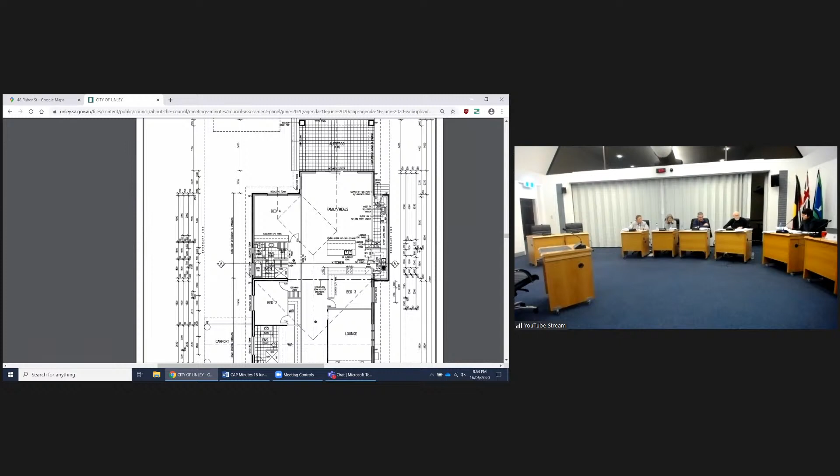Any other questions? Sandy?

I can't see where it nominates the height, the maximum height of that wall. The land falls to the north, where it nominates that it's within 3 metres at the highest point. Can you direct me to where it shows on the plan?

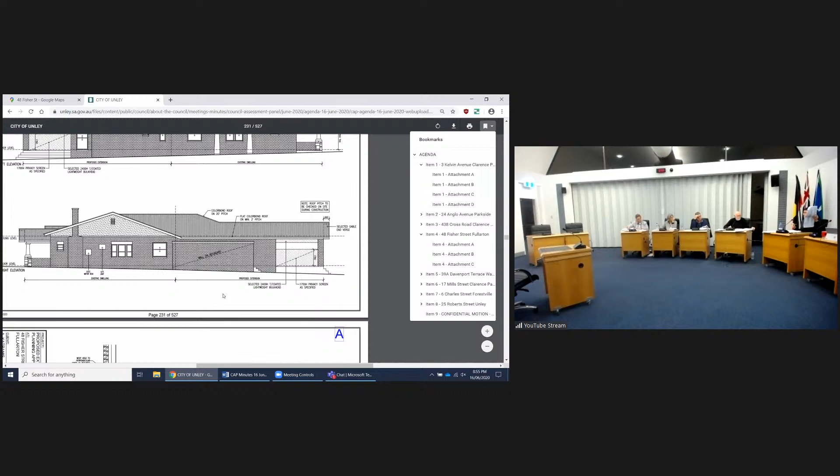This plan shows it, Sandy. Got this one, just in there. It nominates the height there. Relative to the adjacent ground level? Floor level.

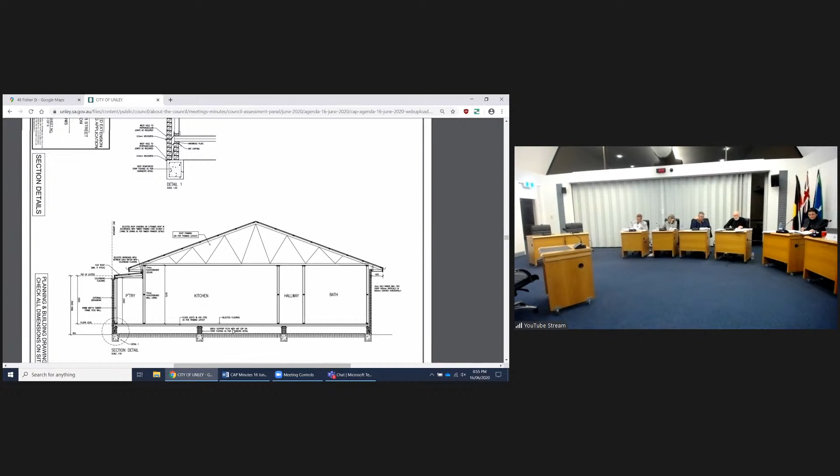But is that at the point at the northern end of that addition with that section? So that section's near the southern end through the pantry, it appears. So at the northern end where the land is falling, it will be higher than that.

Mr. Diamanti, would you like to come forward? On the eastern elevation, there was a line that drew where the fall of the land was. Yes, on the eastern elevation. There's a dotted line, there's the fall of the land line, if you like.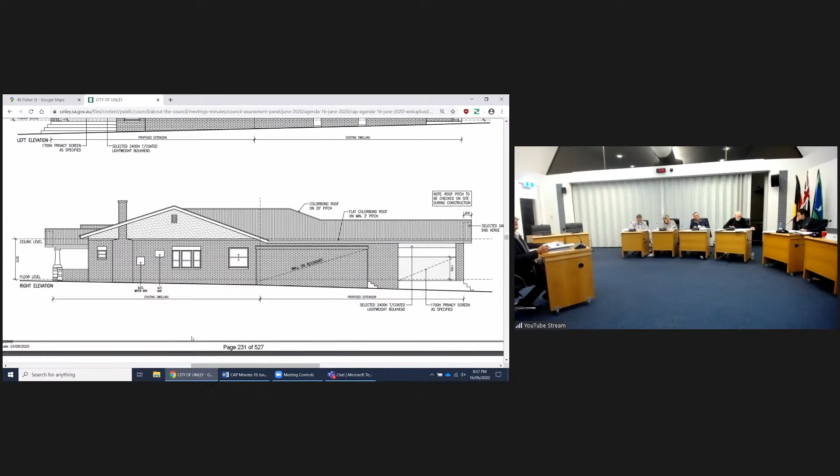So the section is basically through where the end of the word wall on boundary is. It's through that area there. So at its worst point, it's about 80 mil higher.

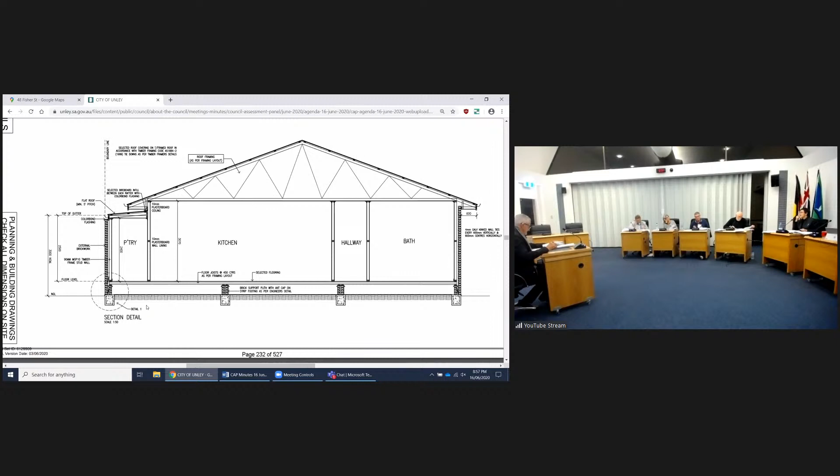On the east elevation, it looks like it drops 3 or 4 courses. On the east elevation? Yeah, look, it's dropping 3 or 4 courses across the length of that wall.

You're working from the start of the pantry. The section goes through the middle of that wall. Okay, so it goes through the middle of the wall, so it's about 2 courses.

Thank you, Mr. Diamanti. Any other questions, Brenton?

I'm happy to move as per the recommendation. The proposed development satisfies the policies in the plan, height-wise and length-wise, similar to the garage. So happy to move as per the recommendation.

Thank you. Seconder, Brenton. Thank you, Brenton. Any discussion, questions, members? Sandy?

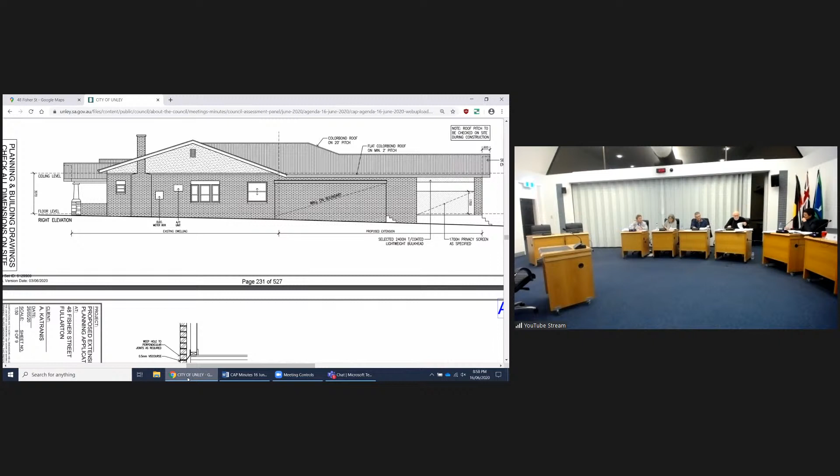I note that this lovely bungalow is in the landscape zone where demolition of the house would be allowable. It shouldn't be the case, but it is. So I'm pleased to see that the house is being invested in and renovated, being the bigger picture.

The development plan does allow for 3 metre high walls on the boundary. I think it's regrettable that it doesn't actually seek a lower height than that, which can be achieved by putting cupboards and things on the boundary. But it is of note that when there's a falling site, it's more like 3.3 metres at the northern end because of the fall in the land.

But I think whilst it would obviously be better if it were lower using cupboard space, the development plan doesn't dictate it, but we perhaps could have required the wall to be a foot lower based on 3 metres being meant to be the maximum height. That's not approximate, it's meant to be the maximum height.

So if there's a wall on the boundary and the land falls, then the maximum height of that wall on the boundary should be 3, which means where the land rises, say it rises 300 mil over the length of that wall, it would then be 2.7. So I think that's how that principle ought to be taken.

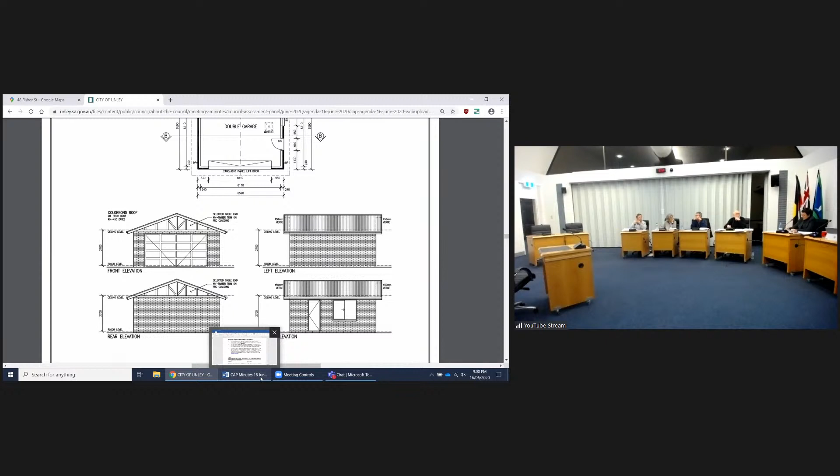I'll support this one on this occasion. Any other comments? So I will make one last comment in relation to your last comment, Sandy. All of this is a balance, and we can chip away at 100 mils, or we can chip away at bigger things. So yeah, we'll move to that.

I was going to sum up. Yes, I'm allowed to it, sum up. Even if it was a bit higher, I still would be moving the recommendation.

Thank you. I'll put the motion. All those in favour? All those against? That's carried. That is an application for an approval.

We'll now move to an application for the removal of a tree at 39A Davenport Terrace. And do we have Dean Nicole in the room? Thank you.

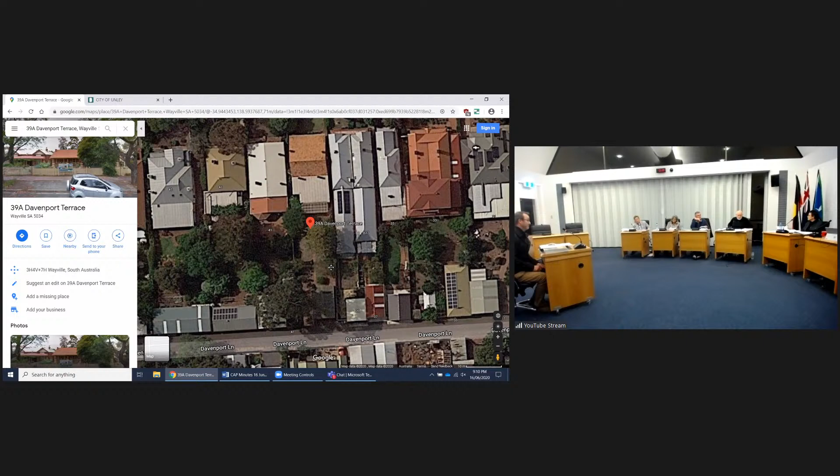I agree. Thank you. Any other questions? Andy?

Arborists that I have engaged in my professional life have employed cabling to mitigate risks for clients who are concerned about tree limb drop. That's a direct way of addressing the risk factor, which is what you've been on about.

How much experience with using cabling have you professionally had, and have you looked into this option for this particular tree for your client? Yes, I do often recommend cabling as a method to reduce or control the incidence of branch failure, either to catch falling branches or to actually stop them splitting apart in the first place. There's various ways to do it. I'm not actively involved in the practical application of cabling, just like I'm not involved in actually pruning trees or removing trees.

Yeah, that's a good analogy.

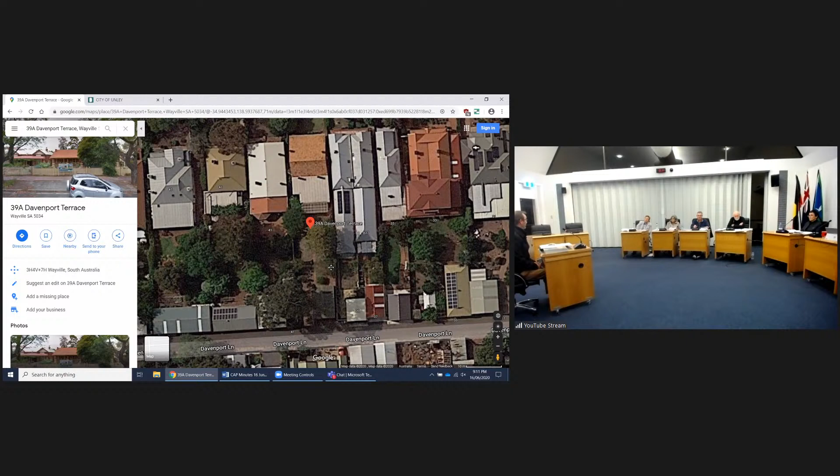Cabling does work really good in certain species, particularly in species such as oaks and elms, winter deciduous European trees. In eucalypts in general, it's not used very often, and particularly in individuals like this, I wouldn't recommend it because the tree is not fully grown. The branches generally need to be fully grown, in their position as a mature tree, to recommend cabling, because otherwise you'll cable branches, but then they'll grow much longer and the cabling will be too far down. The other thing with a lot of eucalypts is they have relatively brittle wood, and cabling doesn't work very well in species with brittle wood either.

The type of branches that are also failing in this tree aren't what they call the primary scaffold branches, or the main framework of the tree. It's all the secondary branches, about arm or leg thickness or smaller, so there'd be literally 50 or more of those branches in this tree. So even in theory, if cabling did work in this tree, it would require an awful lot of cables, and it would require recabling as the tree got bigger over time.

Brenton, last question. Apologies, we're going through lots of questions.

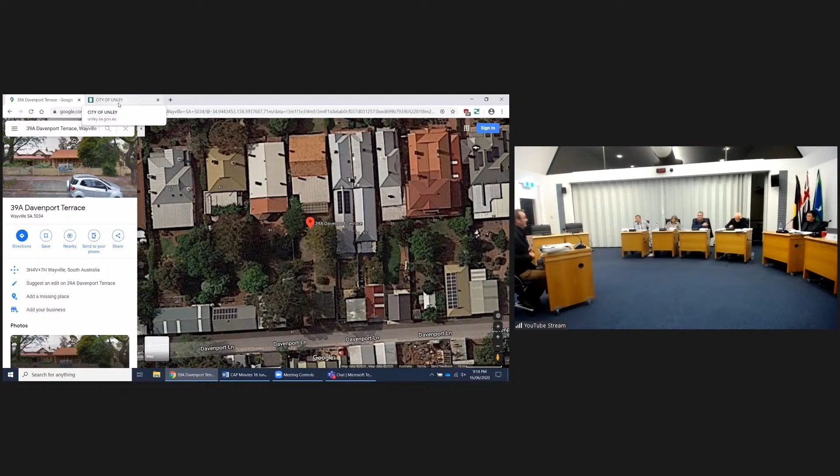And what's the neighbour think about the removal of the tree? Because this is subject to Category 1, which means it hasn't been through public notification, so is there a letter of support from the neighbour to remove the tree? I'm just curious. Yeah, that's probably a question for the applicant. I did speak to the neighbour, however, because when I went back to measure the trunk circumference, I had to have access to both sides of the fence to do that. The applicant and the neighbour seemed fairly friendly, and they were happy with me measuring it. They were aware of what my recommendations were, and there didn't seem to be any conflict. But other than that, I can't say - that's really a question for the applicant.

Any other questions? No? Thank you for your presentation. Thank you.

Sounds like there's some questions for staff, though. And I asked that one question of staff. Because this is Category 1 notification, which means the neighbours haven't been formally notified, do we know what the view of the neighbour who has part ownership of a tree thinks of the application and the removal? Is there a supporting letter, anything of that nature? Bear with me for a second, I'll quickly look up on our system. I don't believe there's anything in the report that alludes to that.

Are there any other questions? No other questions? Do you want to, regardless of what the answer is, Brenton, elaborate on why you're asking the question?

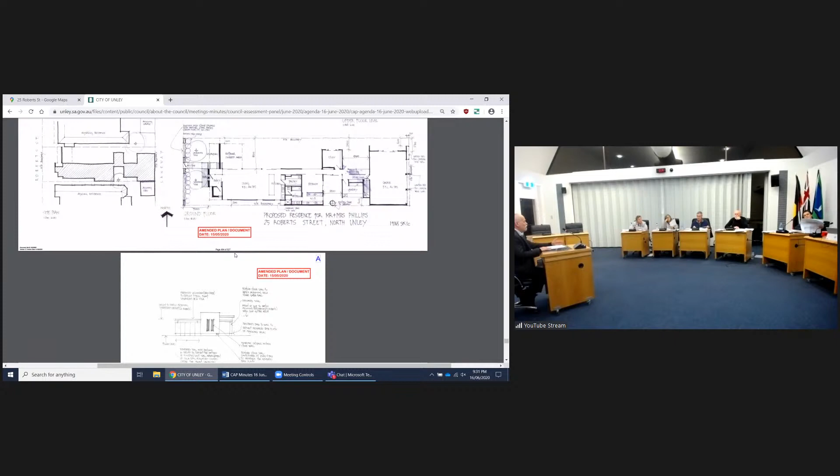So I provided a little sketch around the sun angle in the middle of winter. I think it illustrated that if we built a villa complying with the current setback and built exactly the same as what is on both sides of this property, there'll be less light getting into those windows.

The dictating point is the ridge of the villa. We're very mindful that the existing fence there is just under 2 metres high along that boundary, and the floor level of the new property is slightly less than the existing property, as dictated by the laneway and council requirements. So effectively the floor level of the proposed development would be approximately 100 mils above the floor level of their house. So the way we've set up the height of the wall is actually from their natural ground level, not our natural ground level, to keep it down to less than 3 metres.

Any other questions? No other questions? I shall let you take your seat in that case. Thank you. Questions of staff? No.

Members, how do you wish to proceed? Sandy? I think the proposal has a lot of very positive aspects. The floor plan is beautifully oriented to the north.

The diagram from the applicant demonstrating how the winter sun will get into the top half of the southern neighbour's windows is very clear and conveys that it's satisfactory in terms of overshadowing. The two-storey element at the rear is adjacent the neighbour's garage, which is on the boundary. I wouldn't ordinarily be supportive of a two-storey structure that close to the boundary, but given that it abuts the neighbour's garage on the boundary, I'm comfortable with that.

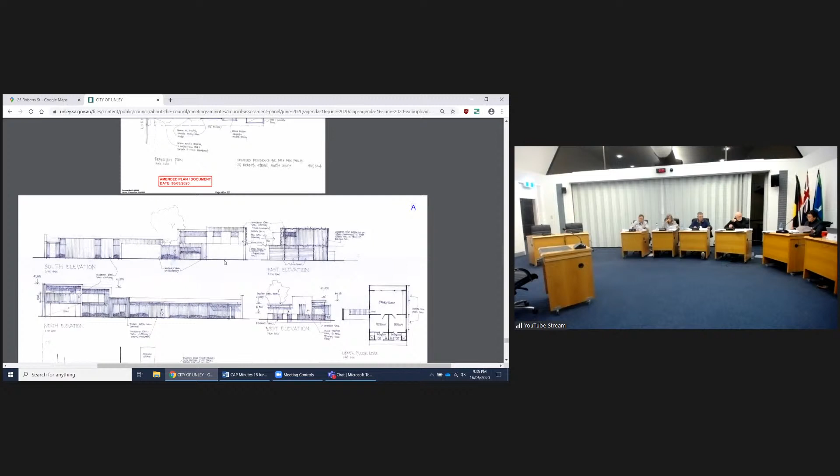And replacement of a building detracting from the desired character, such as the existing building on the site, which is a 50s, 60s nothing building, will respectfully and carefully relate to the adjacent design buildings.

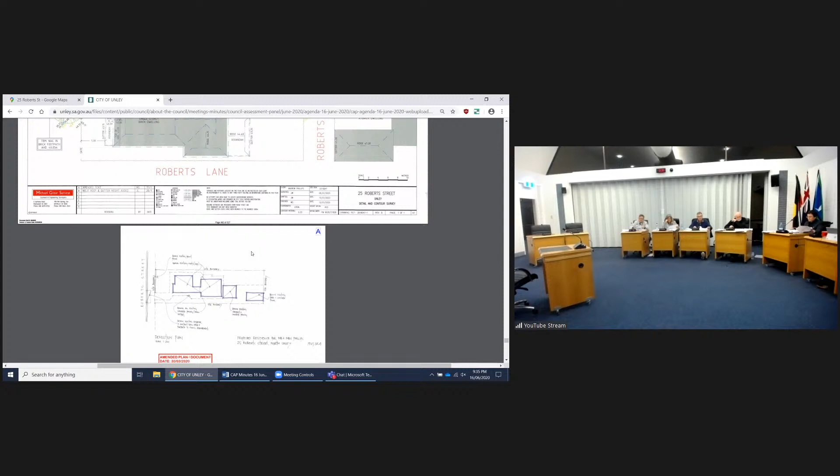Characteristic patterns of buildings and spaces and gaps between buildings in localities of distinctive and generally coherent character, consistent with pertinent desired character, should be composed in a more traditional manner, adopting key building elements, materials and detailing complementing the characteristic architectural style. In the report, it states that the locality is not consistent.

Yet, when I looked at the locality, I would certainly accept that statement for the western side of Roberts Street, which is the Dog's Dinner. But the eastern side, from number 1 through right up to the corner of Young Street, is almost entirely intact villas like the ones on either side.

There are 2 two-storey reproduction buildings which were built before the current development plan. There's one group of home units at the far northern end, but the rest are all turn-of-the-century villas with 3.6 metre ceilings and hipped roofs.

So it is an area of a generally cohesive character. It is not a disparate character in this particular streetscape. But even if one were to accept what the planning report says, that it's a disparate character, Principle 12 says in localities where the built form and character are incoherent or generally in discord, development should redevelop a site by replacing the discordant elements and better support the desired character.